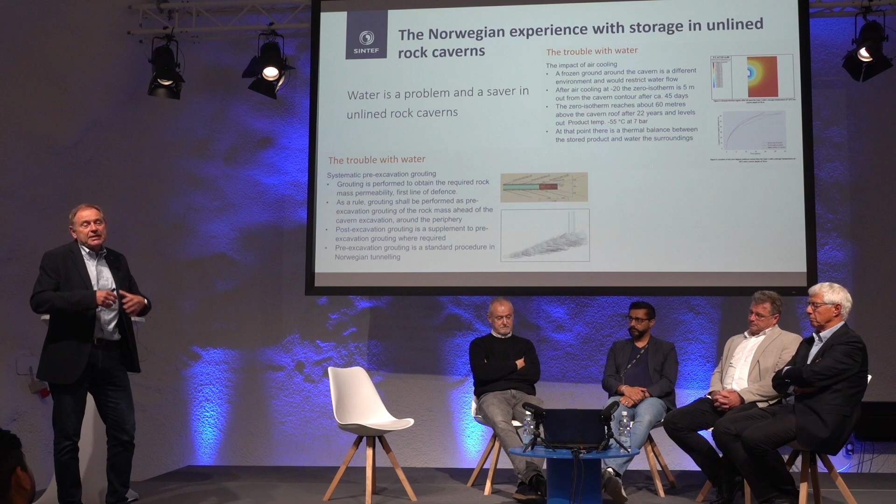Water is, of course, both a troublesome thing as well as something that is actually a saver for us. As I said, water in the surroundings of the cavern will freeze when we are injecting the product, and that will make a cap around the cavern.

But it will continue to grow, and we have seen from numerical models it reaching something like 60 meters away from the cavern periphery after 22 years. That is with minus 55 degrees and 7 bar pressure. It's just growing and growing, and at 60 meters, you can see on the graph there, it's sort of balancing off. It goes to a kind of steady state.

The trouble with water is that if there is a leakage into a cavern where there is a frozen product located or stored, this water will start to form ice, and it will start to steal the volume in the caverns themselves. And I think that we have had maybe 1 or 2 occasions in Scandinavia where we actually have had to abandon the cavern because we lost the product storage volume.

And that's not good. But in principle, water is always a good thing to have, groundwater plus the hydrodynamic confinement with the barriers that we are making with the water curtain.

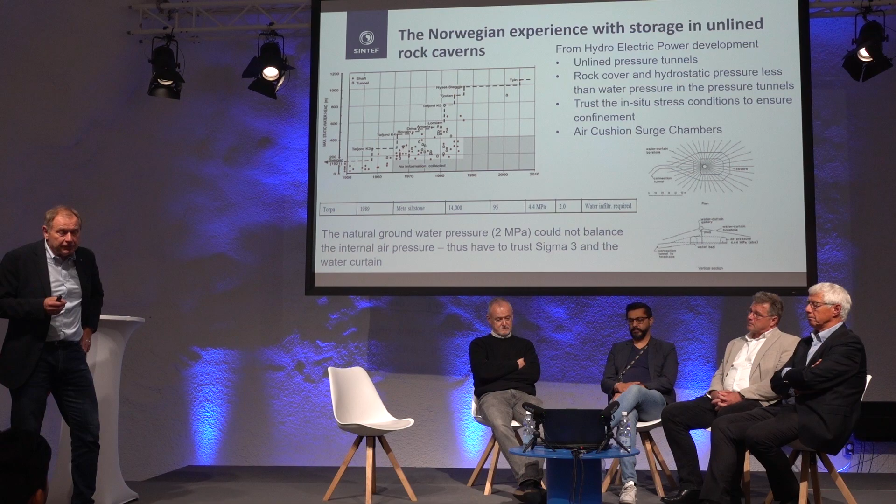They have also a kind of system which is called air cushion surge chambers, where we are using water curtains actively. You can see the picture on the lower right-hand side, which is an air cushion surge chamber at a project completed back in the middle of the 80s. The air cushion chamber itself is formed like a donut, and there are water curtain holes covering the entire area of that air cushion chamber.

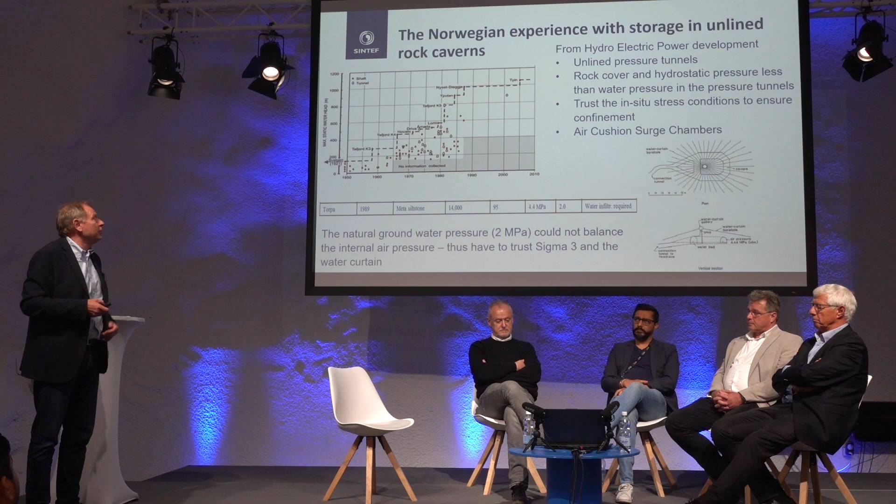And the pressure in these holes for the water curtain is something like half a megapascal above the water pressure in that air cushion chamber. So there's an air-filled volume which is pressurized, and then you have the water curtain on top of that, which is there to take fluctuations in the pressure when the hydropower tunnel system is in operation.

This is just some statistics. You can see that with respect to hydropower projects, the use of air cushion chambers has reached, I think, 13 different projects, with the highest pressure of 7.8 megapascal in the air cushion chamber itself.

Well, just one thing which I forgot to say. The minimum stress component, sigma 3, is a major stakeholder in the possibility of actually being able to make this kind of facility. We have to know the minimum stress component. That is the natural resistance towards product trying to escape from the cavern or from the headrace tunnel. Sigma 3 needs to be measured. We need to have a sigma 3 at a certain level, with a safety factor with respect to the storage pressure that we are actually using.

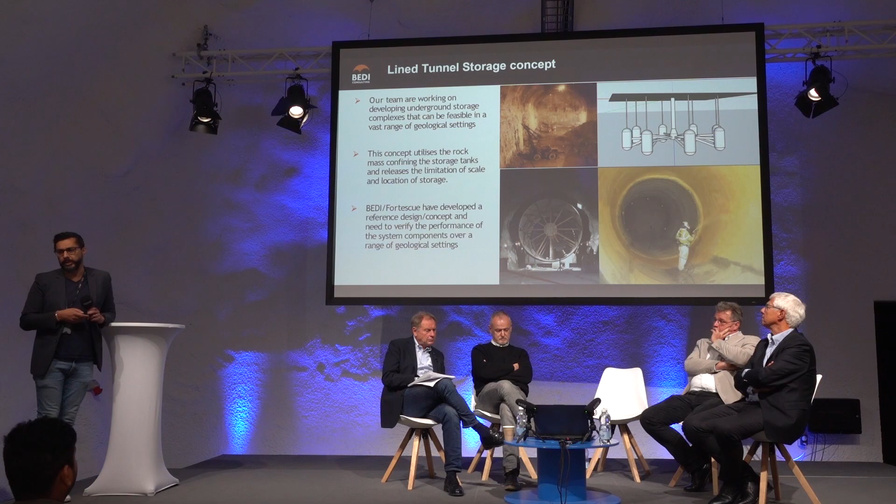And we've worked for about 1.5 years with Fortescue and developed a reference design and a concept. So we're at a stage that we need to verify the performance of that. It's just theoretical at the moment in terms of analysis that has been done numerically and analytically, and concepts developed together with FFI. And we've been looking at other materials as well, so not just steel and concrete, but we've been working with the likes of Normet, et cetera, looking at whether polymers, et cetera, can be used to contain hydrogen.

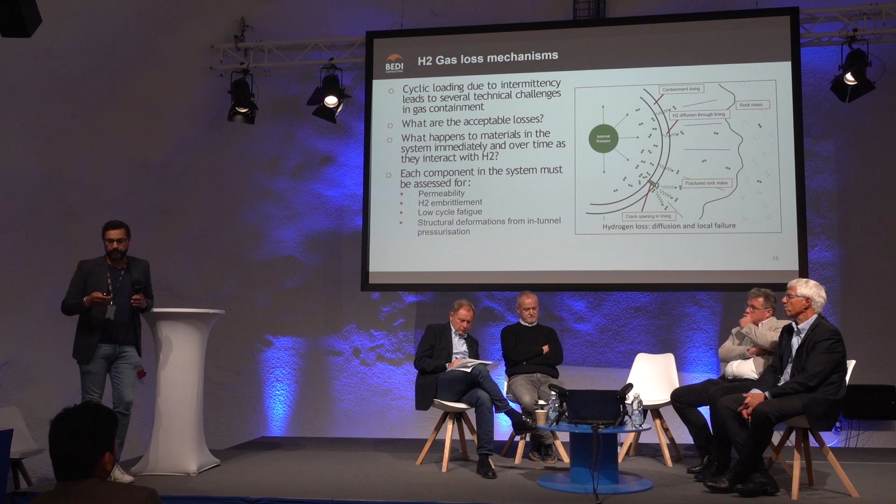So it wouldn't take much. A small crack in the tunnel containment system would end up with a large loss in hydrogen. So we need to consider the structural movements and the ground structure interaction movements, using things like the in situ stresses and the stiffness of the ground as key inputs. So it's a very, very complex system, and we've done some analysis on this at the moment, and we're now looking to move into a testing stage, which is again amazing, to be here in this facility.

This is a very heavy slide. I won't go through it all, but let's just focus on the circle. The gas membrane, so we're trying to contain hydrogen, and the membrane itself, whether it be steel or polymer, needs to be flexible for those movements to be accommodated and not crack. It needs to be water resistant, as someone mentioned earlier on. There's external groundwater and potentially water internally. It needs to be impermeable enough to accept the losses.

And durable, obviously, over the design life of the structure. So hydrogen is not inert to all materials, so we need to look at the materials that we're using and how hydrogen interacts with those over time and in the cyclical nature. So having looked at all those inputs into the system, it's a very complex system.

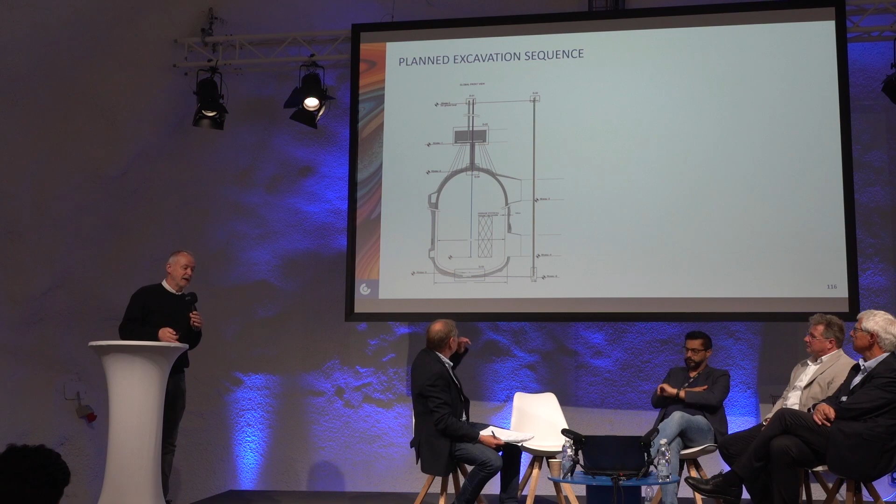So the concept that we are looking at is something similar to what has been proven for natural gas in Skallen in Sweden more than 20 years ago. It was 1980 something, if I'm not wrong. So it's a kind of vertical silo with a sandwich of different materials and with the management of the water with some drainage and some possibility to pump out the water if we have to decrease the pressure inside and not to collapse the liner, which will ensure the tightness of the silo.

So here is some illustration on the way we think it will be constructed. For the excavation, it will be drill and blast in very competent rock. So starting from the upper cupola and then going down with the silo, first pre-cut to avoid damaged rock and overbreaks around, with different access levels, and then maybe a raise boring in the middle, then to enlarge the silo by going down, and then excavating the bottom part.

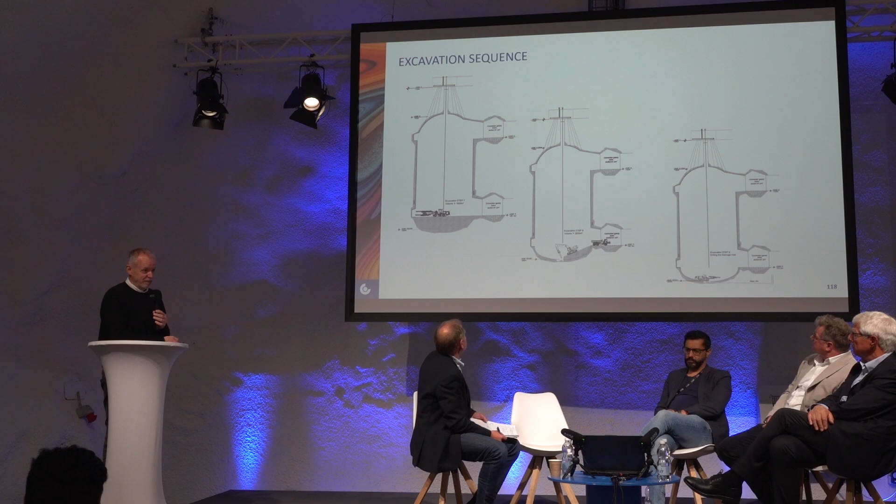I think the excavation itself is not the main challenge. The challenge will be on the quality of the excavation to avoid the rock mass deterioration around the silo. But excavating the silo with drill and blast is quite flexible, so this one will not be the biggest challenge.

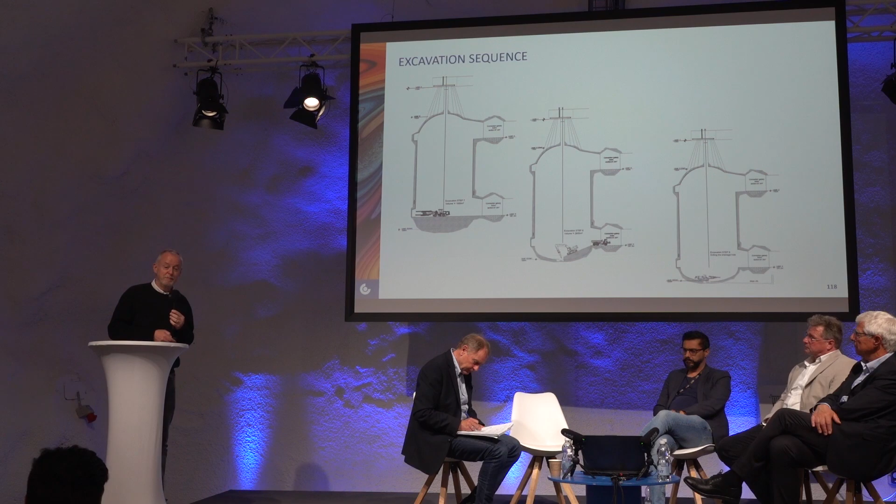Then the challenge might be on the steel liner installation. The steel liner has to be installed. What we think will be a viable way is to install it from the bottom up with a jack-up system. So after the installation of the liner at the bottom and concreting around the liner, it will be filled with water to counterbalance the pressure. And then we will install the liner step by step with the jack-up system up to the top.

So you can see here the different steps of the liner installation, layer by layer, ring by ring, up to the top. So one of the challenges is to install the liner within the required tolerances, for example. And then the size of the silo will also have to be compatible with something which is doable for the jack-up system.

And then the second challenge will be the concreting. Because when we are thinking about a silo of 25 to 40 meters diameter, it means that you have to distribute the concrete all around in a very specific way to avoid the deformation of the steel liner. You have to fill it with water at the same time to counterbalance the pressure. And so this is one of the biggest challenges.

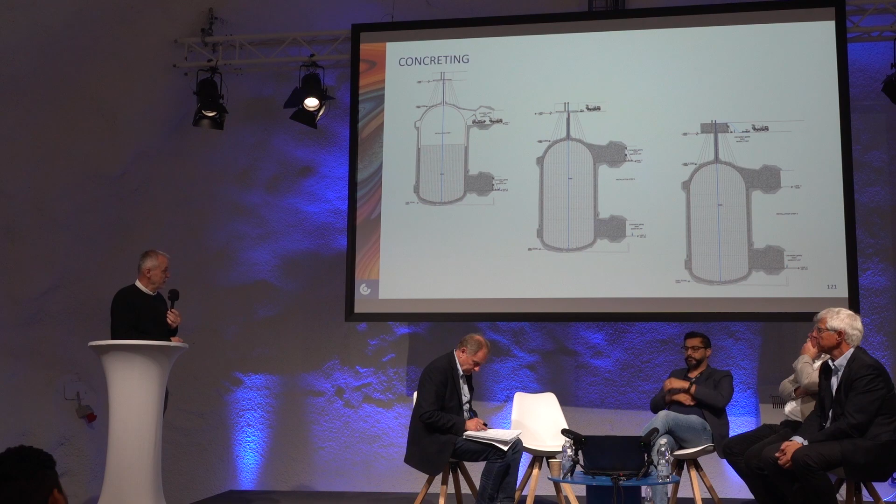It will have to be verified in in situ tests to ensure that it will be doable. So this will add to the challenges that I've presented already in the previous panel. This is what we are thinking about. The storage pressure, to be economically viable, has to be between 200 to 250 bars, something like that.

But the most probable solution will be something like 40 meters diameter, 80 meters height. So at 200 bars, you can store 1,000 tons. This is the equilibrium that we are thinking about between the size and the volume to be stored for economical reasons.

This is exactly the same as presented by Mr. Bedi for the sandwich. So you have the rock mass, you have a drainage system starting from the top to the bottom to the internal part. So the rock mass, a drainage system, a concrete sealing part in between, the steel liner and the silo. And in between the steel liner and the concrete, there will be a kind of sliding layer. So the sliding layer will allow the steel liner to move independently.

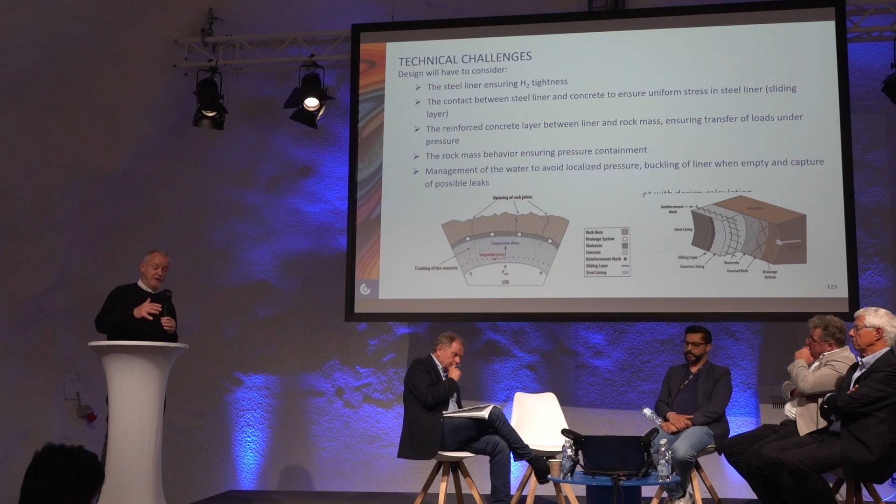So the sliding layer will allow the steel liner to move independently and then to cover the cracks. So the distribution of the cracks will be important. It will be partly governed by the rebars which will be installed to distribute the cracks uniformly in the concrete. But the sliding layer will also help covering these different cracks.

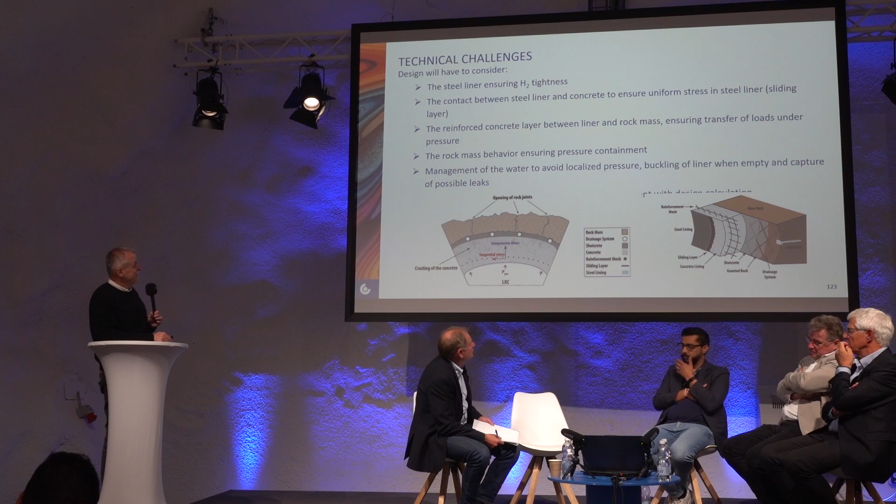So you are talking about 10 millimeter cracks. We are hoping that the cracks will be closer to 2 millimeters or something like that. We are hoping it will be easier. So all these are technical challenges which have to be tested. So the different parts will have to be tested. I think it will be on my next one.

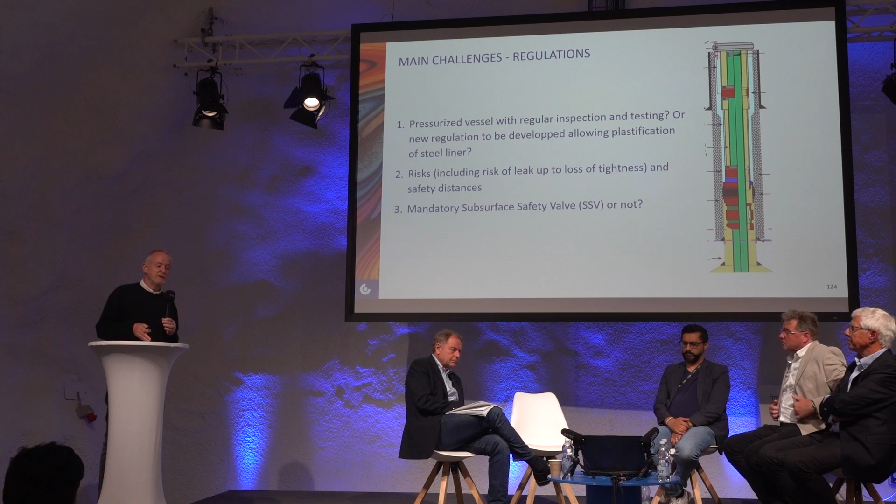There is a second challenge, a third challenge, so constructability, the challenge on the different materials, but there is also a challenge which has been highlighted, which is the regulations to be applied. Because right now, at least in Europe, I don't know for other countries, but I think around the world it's something new also, there are no regulations to be followed for H2 storage.

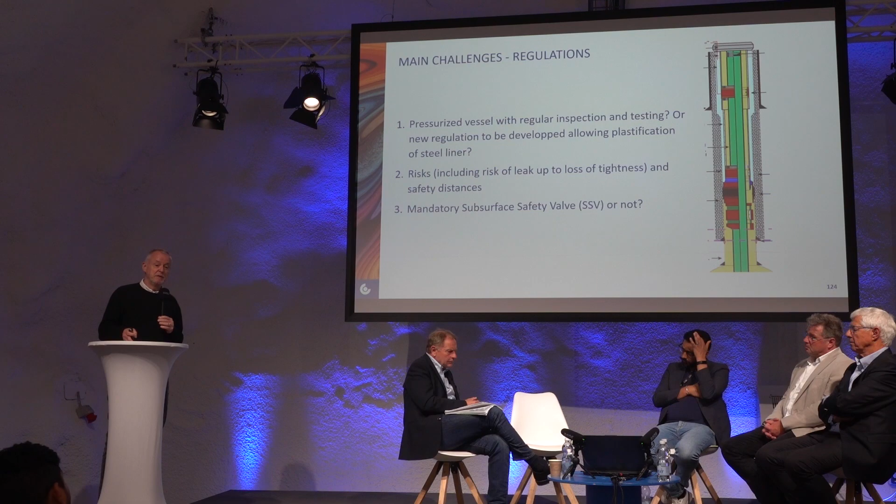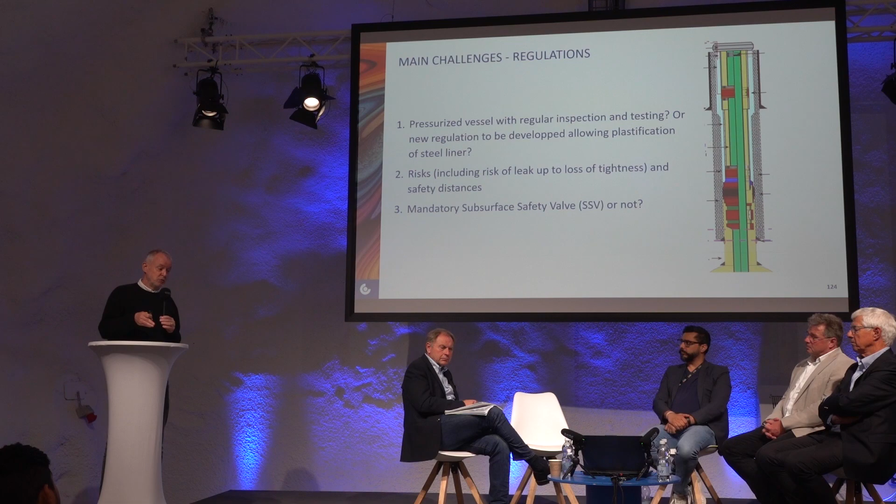So for example, will it be considered as a pressurized vessel? For example, in France, for pressurized vessels there is a clear need of regular inspection, so it has to be inspected from the internal part every 5 or 10 years, depending on the pressure, and then it has to be tested every 10 years. So will it be the same? Because the silos that we are thinking about, with 40 meters diameter, 80 meters high, will be definitively closed without possibility to re-enter after 10 years.

So we have to deal with authorities to find new regulations, but we have to demonstrate that it will be tight and that it will be still safe after 20, 30 years, because we are not constructing this for only 10 years.

Then there is the challenge of the risk of leak. What will be the acceptable leak, how to detect a leak, and how to ensure the authorities that the leak will be contained within the collecting. Here we are thinking about the drainage system, which will be full of water, of natural groundwater, and which will allow collecting the hydrogen to flare on the top or something to verify the amount of the leak.

Then, for example, there is another challenge which we are discussing with authorities, whether there will be a need of subsurface safety valve. In natural gas, for example, we are operating a lot of salt caverns with gas, there is a mandatory safety valve installed at the bottom of the shaft. It's because if there is anything happening, you close the valve as close as possible to the reservoir, and then you have only one part of the gas which will be leaked in the shaft.

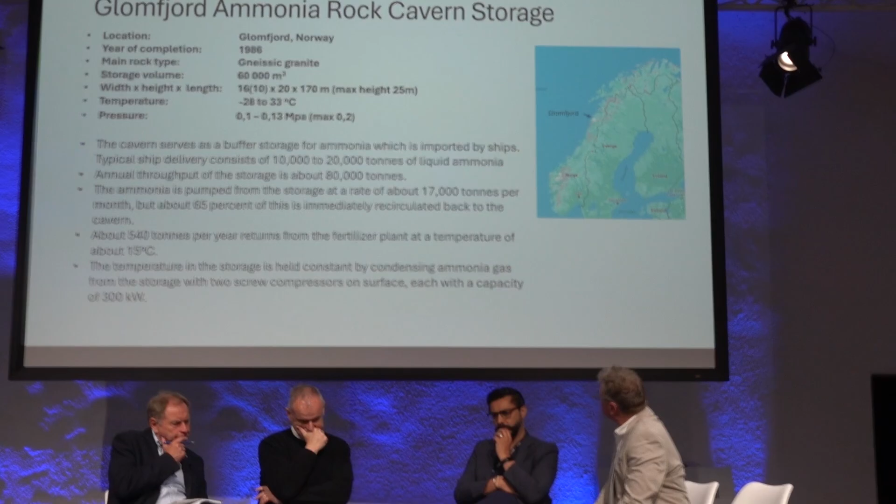What we are working with in Horisont Energy is two projects at the moment. One is a large world-scale ammonia plant in northern part of Norway. When you see Glomfjord on the map there, we are on the very top of Norway in Hammerfest, where we are going to build, construct and operate an ammonia plant with 3,000 tons per day of ammonia, or 1 million tons of ammonia per year.

And if you convert that into hydrogen, the amount of hydrogen contained in that ammonia is basically divided by 5, so then you get 200,000 tons of hydrogen per year produced in that plant. So 200,000 tons of hydrogen is the equivalent. What we are going to do in that plant is to store it in an unlined rock cavern storage. We are now looking into more details on that.

Along with that rock cavern storage for ammonia, we are also planning an LPG storage, because this ammonia plant is going to be a blue ammonia plant. It will be based upon natural gas from the Snøhvit or Snow White fields in northern part of Norway at the Barents Sea. Given some instability in the supply, we are also looking into safeguarding ourselves by having a rock cavern LPG storage on the same site, where those two storages are going to be located side by side to utilize the cryogenic elements.

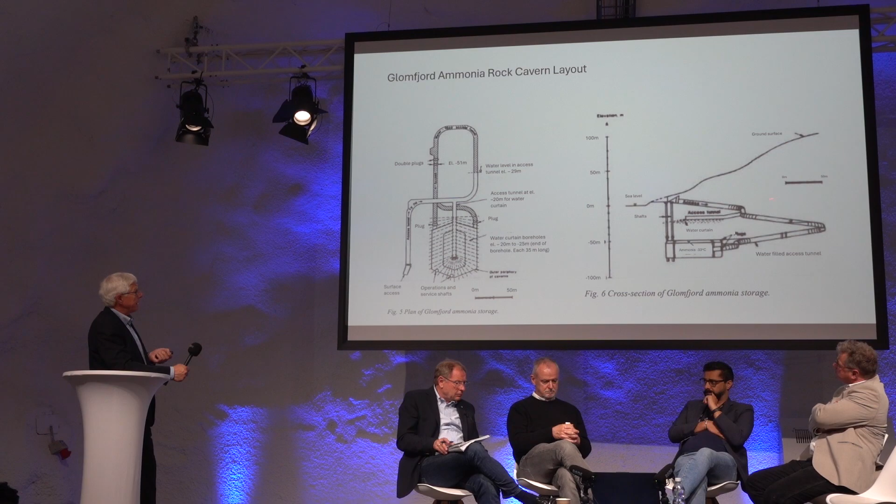And then to safeguard that there would be no leakages, there was also a water curtain tunnel put in at around the 20 meter level, with approximately 35 meter long boreholes to the side to create the water curtain. When we did the checking of the rock quality there, we drilled down to minus 125 meters, and there were only two small crack zones in total. So the homogeneity of that rock is extremely good, that's to be said.

The experience is that this rock cavern has been successfully operated since the startup in 1986. The only issue you had was during commissioning. The main cavern was cooled down to minus 22 centigrades by air, and then it was filled up with ammonia, approximately 5,000 tons of ammonia.

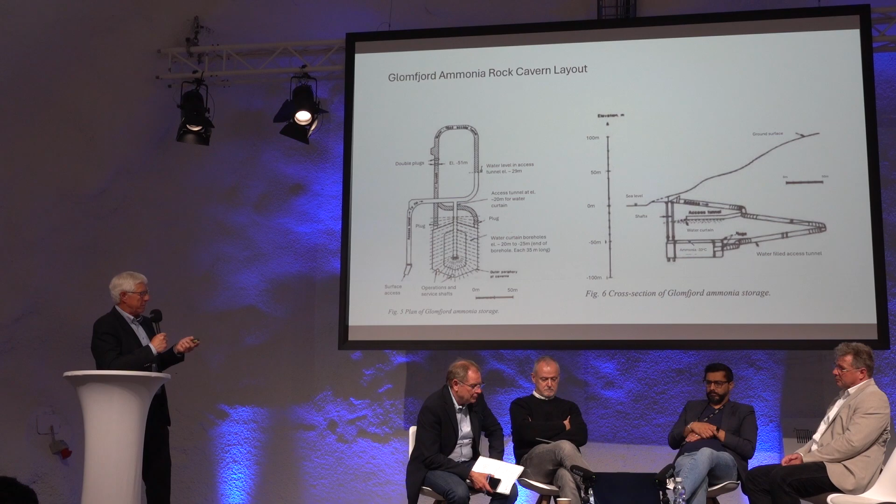When you started filling of the ammonia, a couple of days after putting the ammonia in, you saw that the temperature did not sink. And we realized that there was a leakage into the tunnel. And you could see that the leakage came from the access tunnel because the water level in the tunnel was sinking. And then the commissioning procedure was abandoned, the tunnel was emptied, and there were put in 2 new concrete plugs into the access tunnel further up.

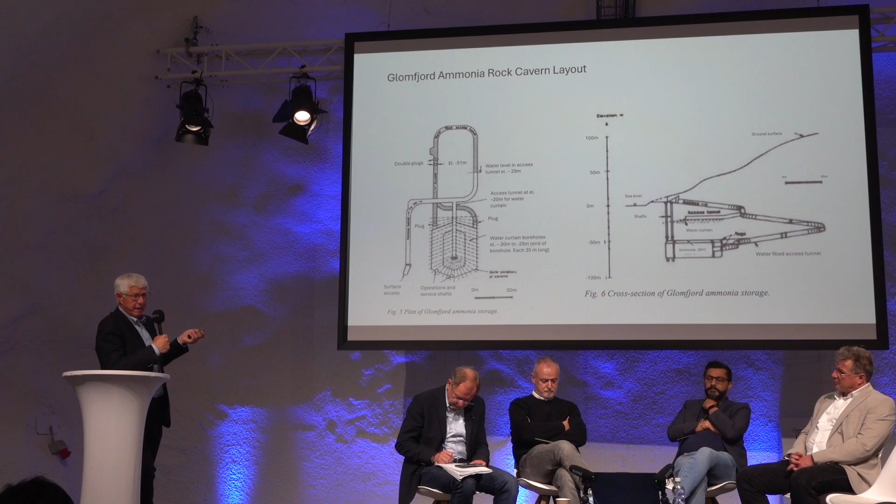And all the ammonia water, which was in the bottom of the storage, was pumped out. And so the storage was completely emptied of all the ammonia water, which was distilled and taken away. And then the tunnel was commissioned back again. And then virtually nothing has been done with it. It has been operated safely for those years since 1986.

The current boil-off is extremely low. And those 300 kilowatt compressors are only running partly every now and then. During winter time and summertime, it's just a couple of hours per day which they are running. So it indicates that the frost zone around the storage is there, and there is no ingress of heat from the surroundings. So the only heat which is coming there is from the pumping of ammonia. So this shows the benefits of having a rock cavern storage for ammonia, I think.

Thank you, Christian. Thanks a lot to all the speakers. We are a little bit over time,

but I think it's also not very nice to interrupt when people have a lot of interesting and important things to say. If you allow me to just draw one single line between what we have heard, I think Michael is smiling because all of these people are actually crying out for some place to do testing. That's my conclusion from what I've heard.